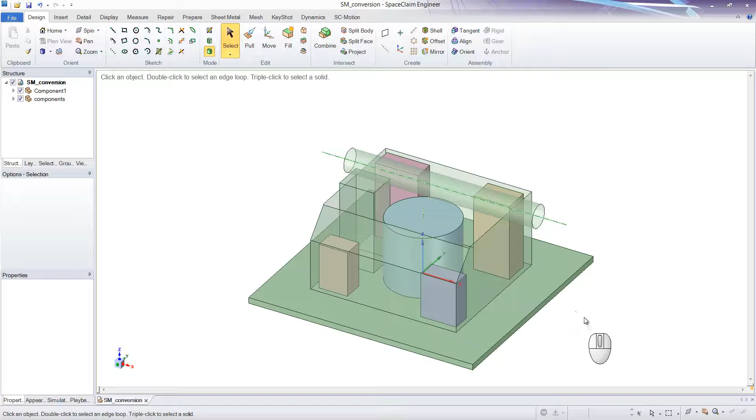So what I'll first do is use one of the surfaces that represent the extents and pull on it to create a solid body. This will be the basis for my sheet metal structure. Now I want to pull on the top of it to make it a little bit bigger. The only requirement is that it sits below that cylindrical surface.

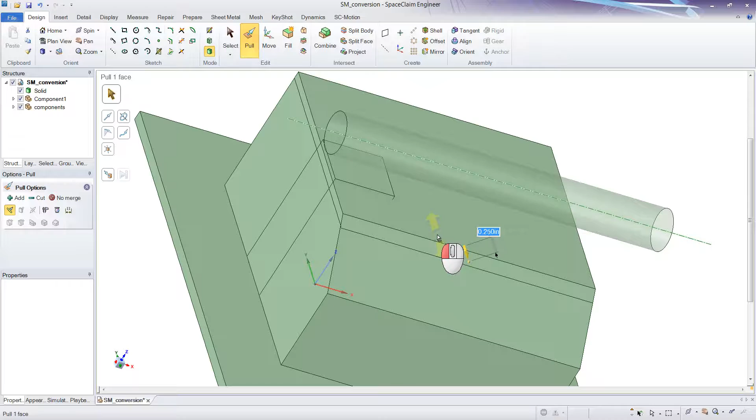And I want to get rid of this small surface here, so I could either click fill or pull on it until it's completely gone. Last thing I need to do is make sure I have no material over this rectangular cutout. So again, using the surface that represents the keep out zone, I can force the pull tool to make a cut and force it to go up to the back surface.

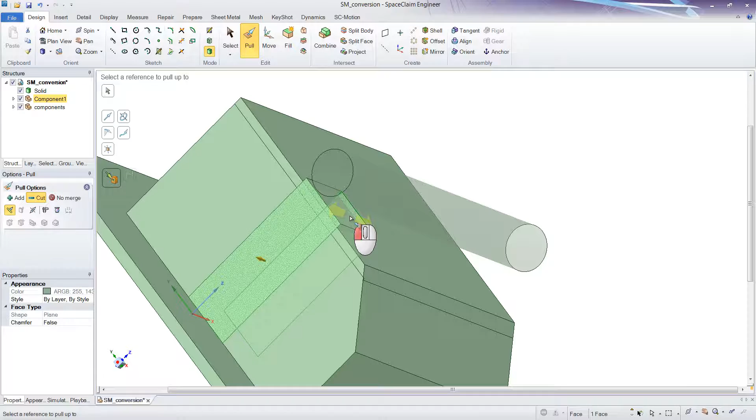Now I can't see the back surface, so I'll query select by rolling up on the mouse wheel until that surface is present and selectable. Then I click on it and remove material away. Now it's time to turn this body into sheet metal.

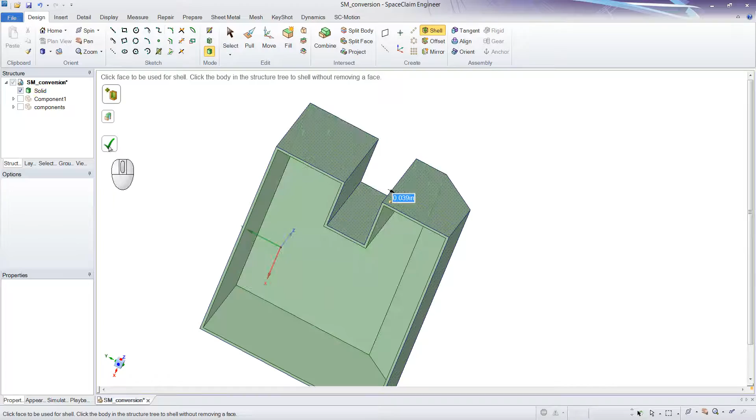How that's done is we first need to shell this out to a thin body material. I click the bottom surface and say shell. At this point you can type in any value you want. I'm going to type in 39 thousandths. That's roughly 1 millimeter. And then click the green checkbox.

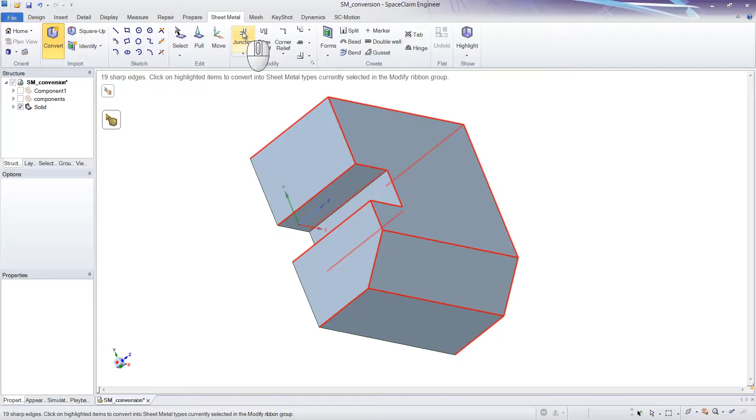So this is going to be our sheet metal body, and we need to convert it to sheet metal. I go into the sheet metal tab, say convert, and click on the solid. Every candidate for a bend and rip shows up in red. Right now my junction type is set to a bend, so any red junction I select turns into a bend.

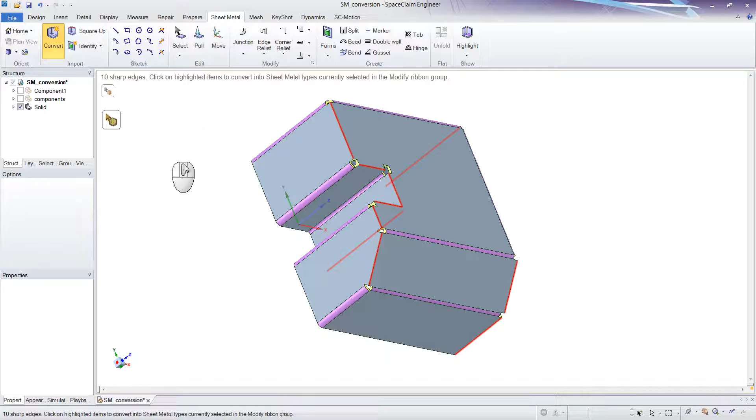I could keep clicking all the way through, and I think maybe I want a couple more bends on here, but I mostly want rips elsewhere. So instead of changing the junction type to no overlap and selecting the rest of these, you can do them all at once. Click the select button to get out of that mode. Triple click on the solid, which does the same thing as selecting the solid from the structure tree.

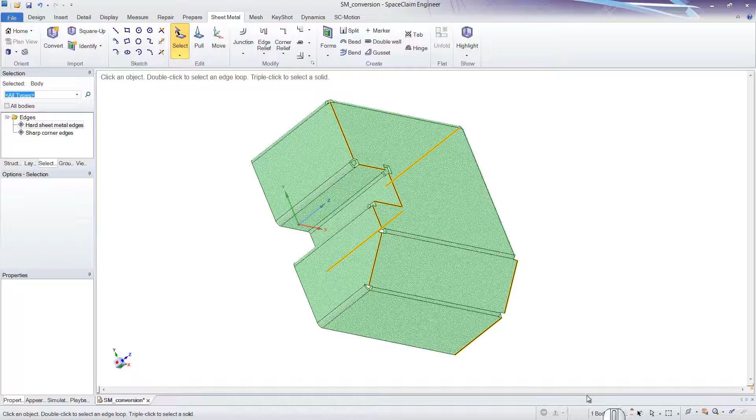With that selected, go to the selection tab and grab every hard sheet metal edge. And you see down below, I've got 10 of those selected. With those selected, I could designate the junction to be a no overlap. And now all those turn into ripped corners.

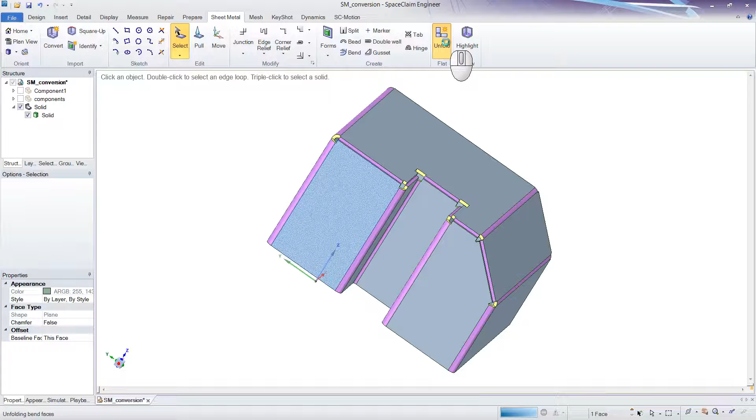So going back to the structure tree, I see that I've got one solid body, so it looks like I've got everything on one body. And hopefully when it unfolds, everything unfolds correctly. So to unfold this, I'll select any planar face and click the unfold button. And there's the envelope dimensions of the unfolded body.

Now if I wanted to try out different unfold scenarios, I could take any of these junctions and convert them from a rip to a bend, or vice versa. In the select tool, I'll go grab a junction and turn this into a no overlap ripped junction. Now when I do that, you see I have two solid bodies in the structure tree. This one has no bends associated with it.

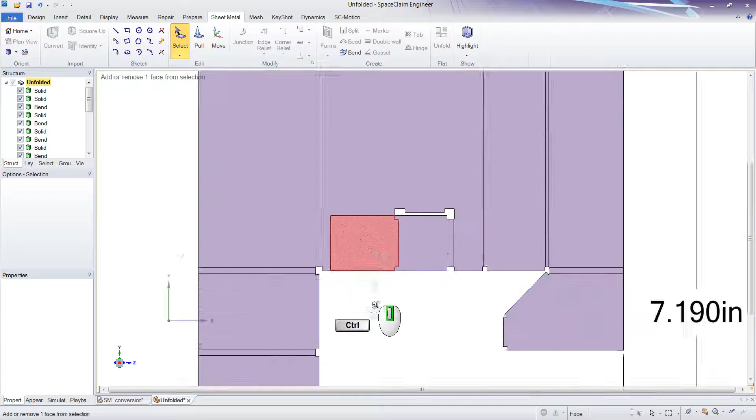So I could maybe take that junction and turn that into a bend if I wanted to. Now I'm back to one solid body because it's all joined together. And let's see what that looks like in the unfolded state. I'll click a planar surface and say unfold. Now you see that I've got a big overlap in bright red between these two flanges.

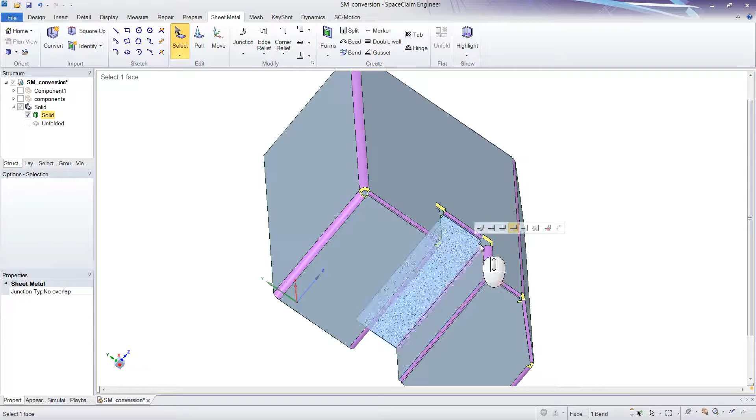That's not going to work, so I'll just close out that flat pattern and grab maybe this back junction. I can't see it, so I need to use query select to roll up on the mouse a few times until the purple becomes selectable. Now I can select it and turn the top one back into a rip junction.

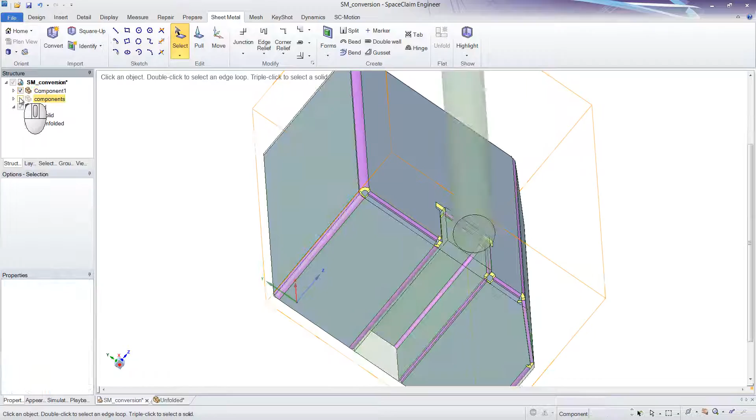Now I should be able to unfold this without any problems. Click any planar face and say unfold. Now you see there's nothing showing up in red. So just to recap, I've shown you how you can take an existing design with components and restrictions on it, turn it into a solid body, and then turn it into a sheet metal body.